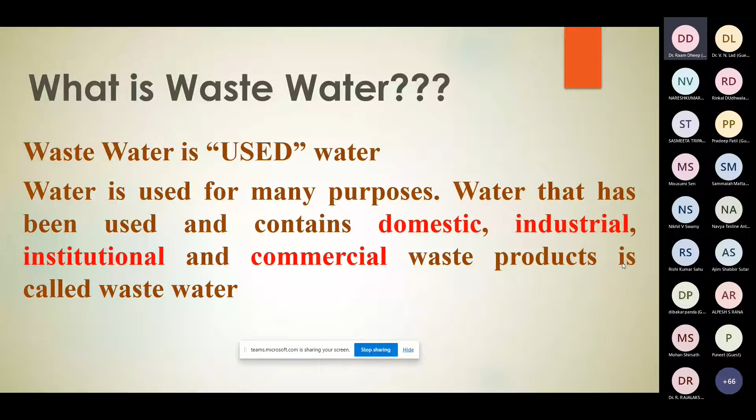I've used this simple terminology. So wastewater, which is also known as used water, is used for many purposes like domestic, industrial, institutional, and commercial. So what is our purpose? Our purpose is to use this water, and when it becomes wastewater, we want to reuse it by using some treatment, so it can again be used for some industrial or domestic application.

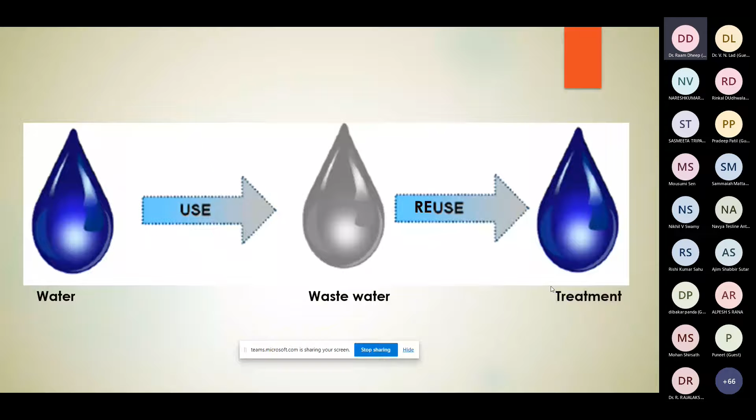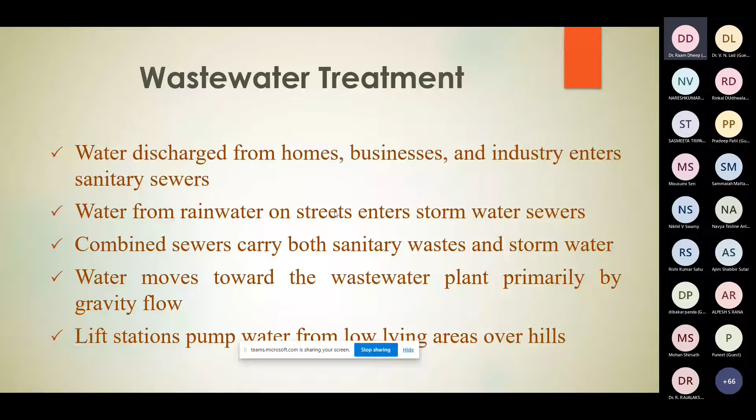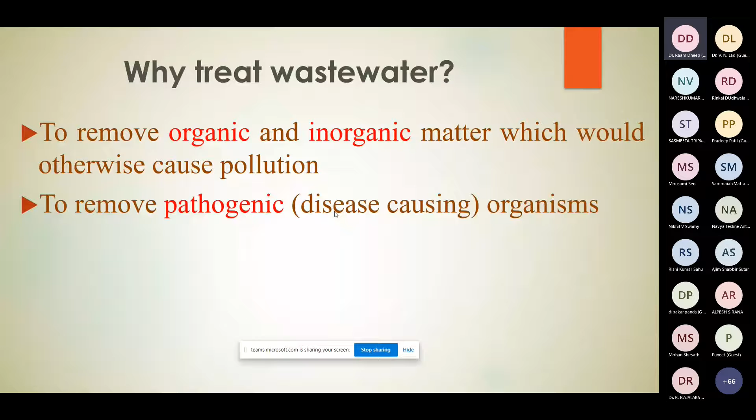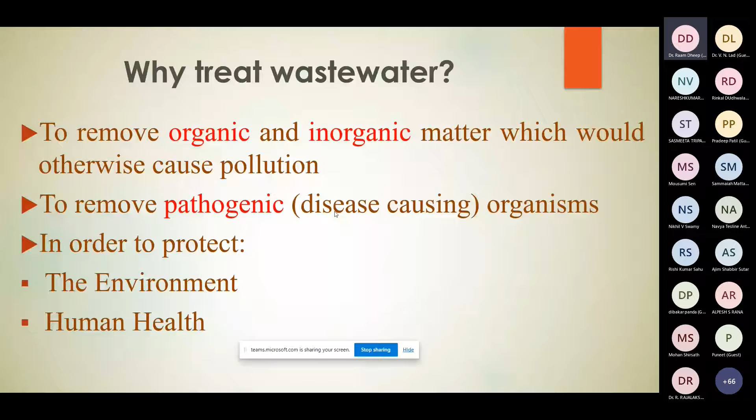What is the need of treating wastewater? It is very obvious: to remove mainly organic and inorganic matter which would otherwise cause pollution, then to remove the pathogenic disease causing organisms, to protect the environment and human health, obviously. So to manage wastewater discharge from homes, business, industry, to reduce the threat of water pollution.

Whatever the water, whether it is wastewater or any type of water, in order to find out the nature of water, we do three types of analysis, that is physical analysis, chemical analysis, and biological analysis, to determine various characteristics of water. So what are those characteristics of water? When you take the sample of water, you mainly do these three types of analysis: physical analysis, which consists of finding out the turbidity, the color of water, the taste of water, odor, that is the smell, temperature.

When you talk about the chemical analysis, you try to find out the TDS, that is total dissolved solids, pH value, hardness, alkalinity, fluoride, organics, metals, nutrients, etc. Biological or bacteriological gives you an idea about the indicator organism.

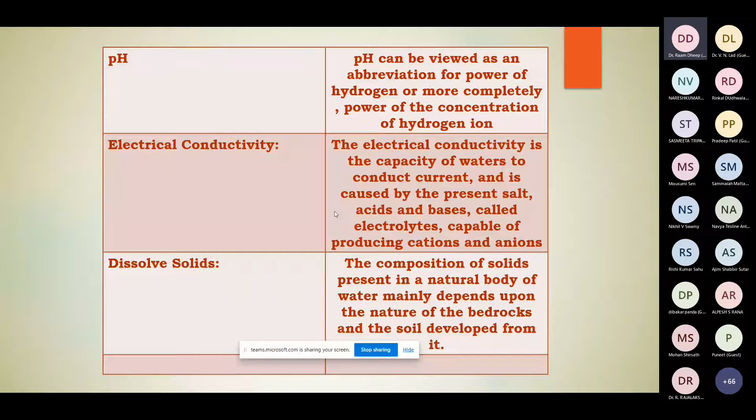So these are very simple definitions about pH, electrical conductivity, dissolved solids, and what exactly you will be able to find out from them. For example, through dissolved solids, you would be able to find out the composition of solids present in the water, then total hardness, dissolved oxygen, a very important parameter. From dissolved oxygen, there are two subsections: chemical oxygen demand, that is COD, which determines the oxygen required for chemical oxidation of organic matter.

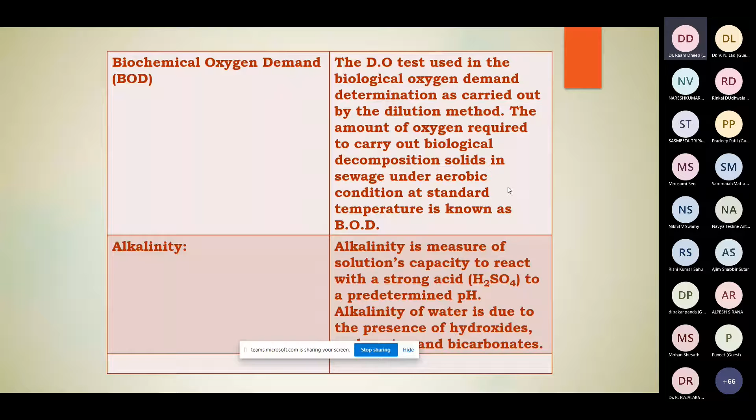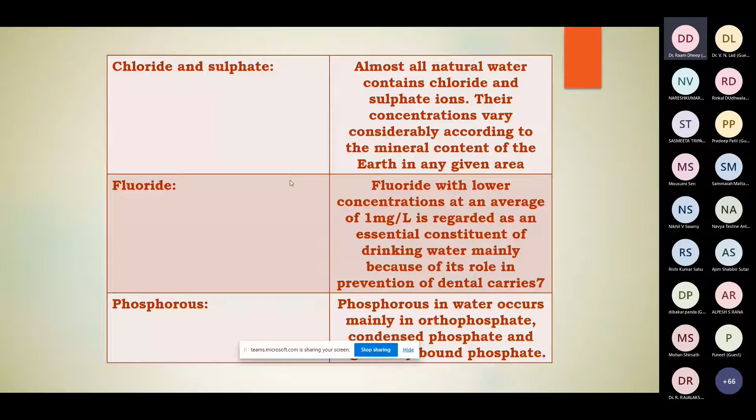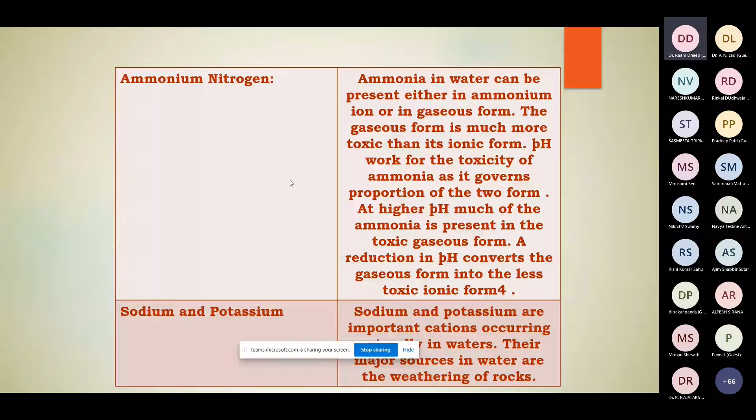Biological oxygen demand, which gives you the idea about the amount of oxygen required to carry out biological decomposition of solids present in the wastewater. Alkalinity, which gives you an idea about the presence of hydroxides and bicarbonates. Then chlorides and sulfates, the quantity of chlorides and sulfates present, the fluorides, phosphorus, and ammonium nitrogen present in the wastewater. This is one of the substances required to be taken care of, considering human health. Sodium and potassium.

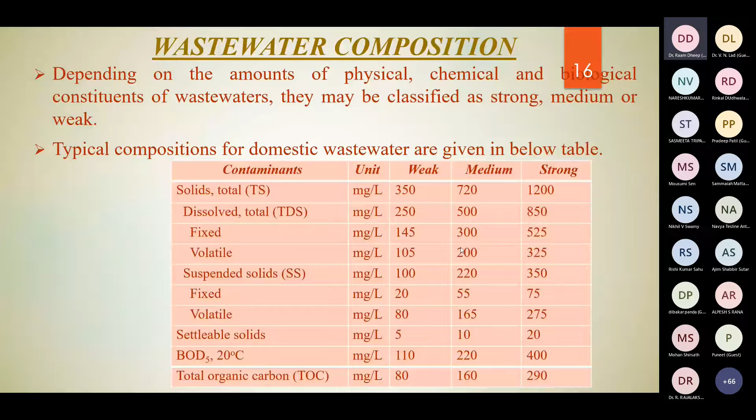The other contaminants are chemical oxygen demand, nitrogen, organic, free ammonia, nitrates, phosphorus, organics, and inorganics. These are the general guidelines which give the idea of which category the sample falls under.

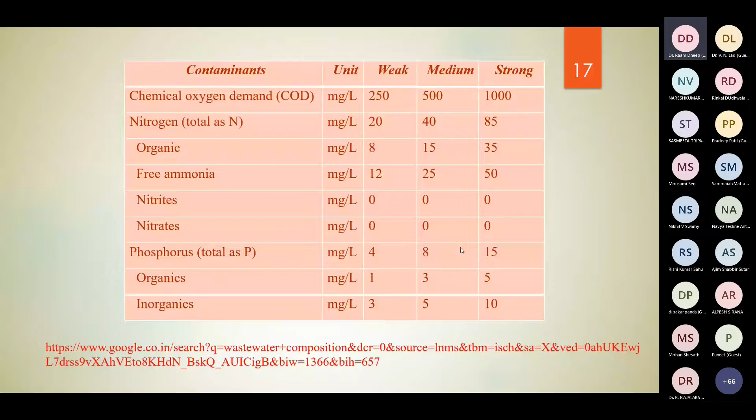What are the disease causing agents? Mainly these are pathogenic microorganisms. Because of them, waterborne diseases like cholera, dysentery or typhoid and others take place. These pathogens are generally carried in water by sewage and waste from farms and various industries. And when this water comes in contact with pathogens and is used as potable water, there is a possibility of causing such waterborne diseases, as I mentioned.

There are some peculiar pathogenic microorganisms, and typical treatments are provided so that they are eliminated completely. There are synthetic organic compounds found in the wastewater, depending upon the industry or source from which the waste is coming, which include pesticides, synthetic organic chemicals, detergents, etc. And unfortunately, these compounds are not biodegradable.

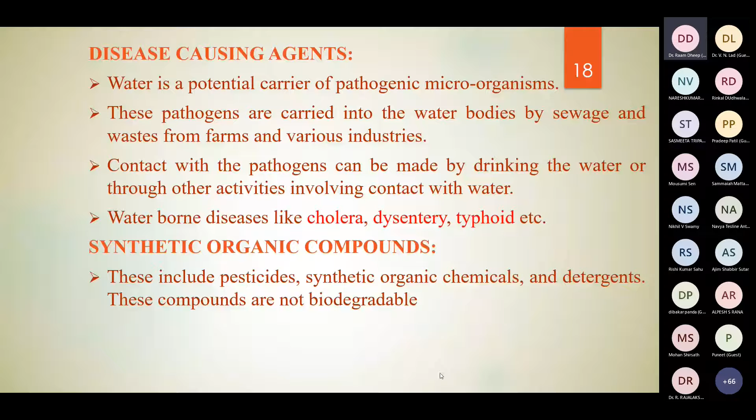Pesticides are one of the very important chemicals which need a proper treatment. It is observed that in the last decade or 15 years, the number of cancer patients has increased. Particularly, more cases are coming in females, and the conclusion is that this is only because of the increased use of pesticides in our day-to-day life, whether it is food or water, right?

So a pesticide is a substance generally used on farms for destroying insects or other organisms harmful to cultivated plants or animals. These pesticides are classified into insecticides, herbicides and fungicides. Chlorinated organic pesticides like DDT, dieldrin, aldrin are hazardous mainly due to their concentration in the food chain, and they are highly stable.

Not only are they highly stable, they have a low vapor pressure, very low solubility in water, and substantial solubility in oils and fats. So for example, generally it is about 0.00001 ppm of DDT, but that is also considered to be harmful.

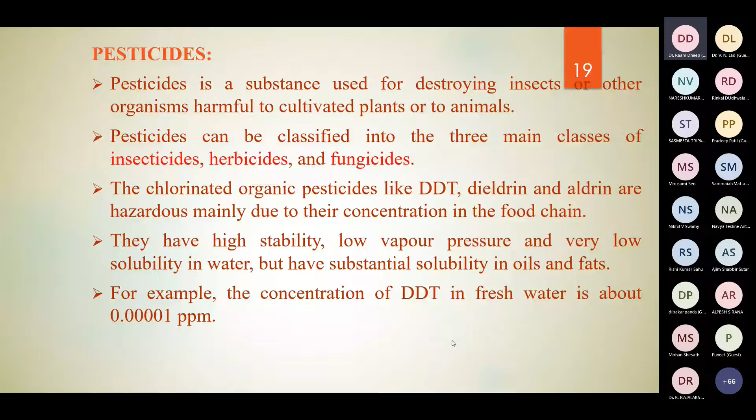Detergents are also sometimes found in substantial quantity in the wastewater, which contains approximately 35 to 75 percent phosphate salts. And phosphate salts cause a variety of water pollution problems. For example, it inhibits biodegradation of organic substances. Some plant nutrients are also found in the wastewater.

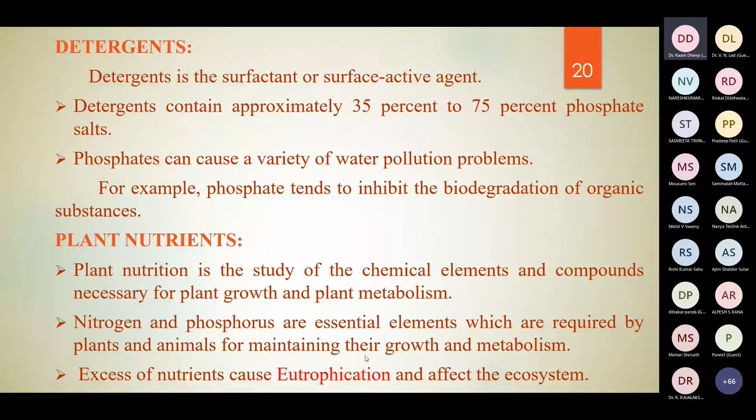Inorganic chemicals and minerals like calcium carbonates, lead, manganese, arsenic, sulfate, etc., are generally found. Sediments: when water is passing through various areas, the soil, sand and mineral particles are also washed away along with the water, and these sediments are generally found in a very good number, particularly in rock regions.

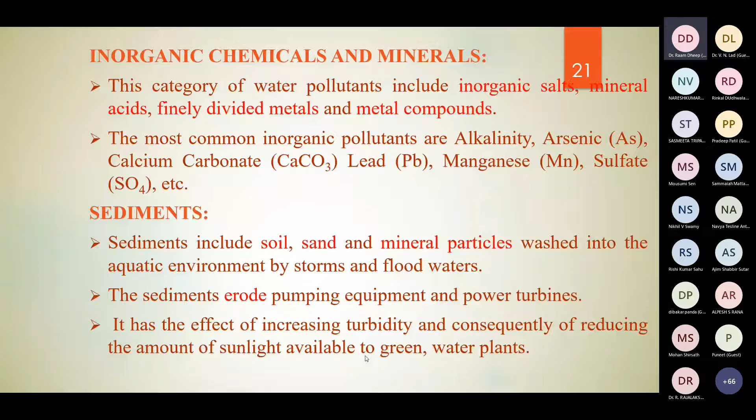Radioactive substances: if the source is a power plant or some kind of nuclear activity, some nuclear reactors, the wastewater coming out contains some, even a very small amount, of radioactive substances. Thermal discharge, like waste heat, is observed in wastewater coming out from power plants. The temperature of the water is generally more than the normal room or environmental temperature.

When the temperature of water is high, the dissolved oxygen concentration decreases, together with increased biological activities, which results in anaerobic conditions, and because of that there is a chance of increased algae in the water, and toxicity of pollutants also increases with increase in temperature.

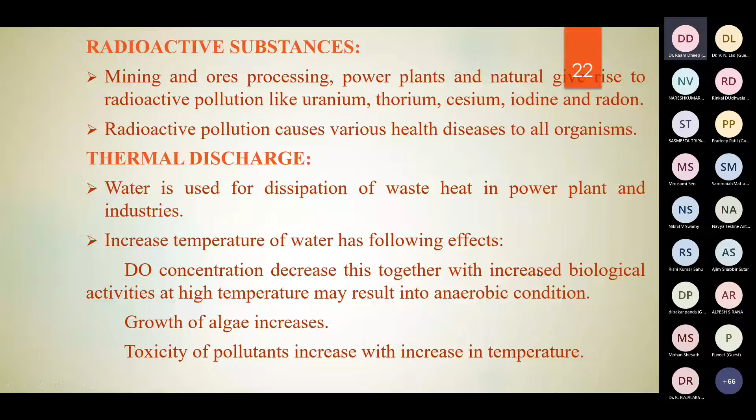Oil spills take place at different places, oceans and seas, or in petroleum refineries, petrochemical plants, even polymer plants. This oil floats on the water surface and prevents atmospheric oxygen from mixing in the water. So this is one of the issues which need to be taken care of, and it coats the body of aquatic animals and birds, and it may also kill them.

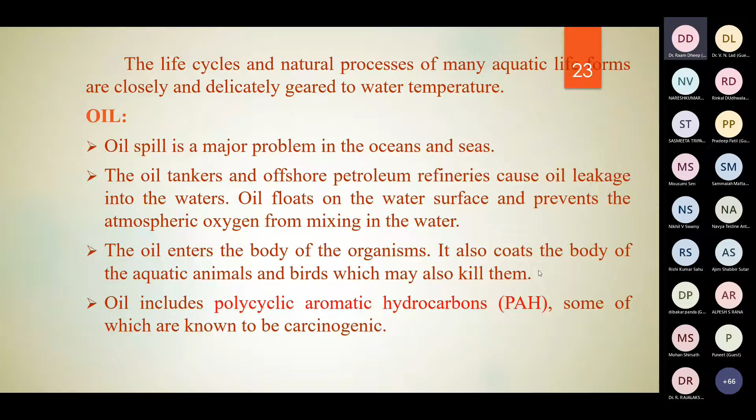This oil includes polycyclic aromatic hydrocarbons, known as PAH, some of which are known to be carcinogenic in nature. So whatever I mentioned are the various impurities. I'm using the word impurities or waste, which are generally found in the water, and because of that we are defining that water as wastewater, right?

I repeat again, I have taken these directly from the treatment plant, and most of the time they are finding these substances in a small amount or maybe a big amount, but these are generally the substances which are obtained. I'm using some terminologies for wastewater engineering. To begin with, I'm not going in detail.

Biosolids are classified into class A and class B. What do you mean by class A? Class A means biosolids in which the pathogens are reduced below current detectable levels, and class B means they are treated but contain higher levels of detectable pathogens than class A biosolids.

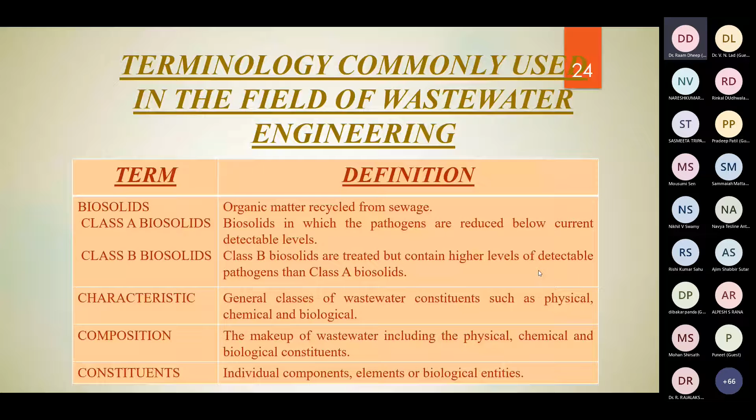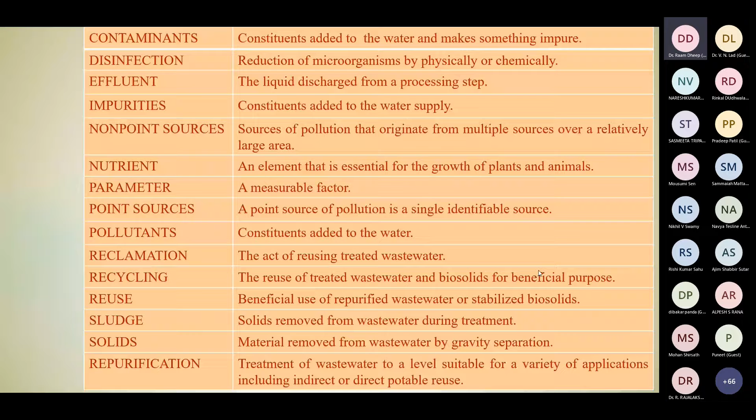The characteristics, compositions, constituents, all these things, I'm sharing this presentation after my lecture gets over. It will be useful to you for future use.

The government has been aware of all these issues for so many years, and because of that, both state and central government impose some kind of laws to control water pollution based on some standards. The Water (Prevention and Control of Pollution) Act was passed by the parliament, the first law, in 1974. So what was the objective? It was to control water pollution and to maintain water quality.

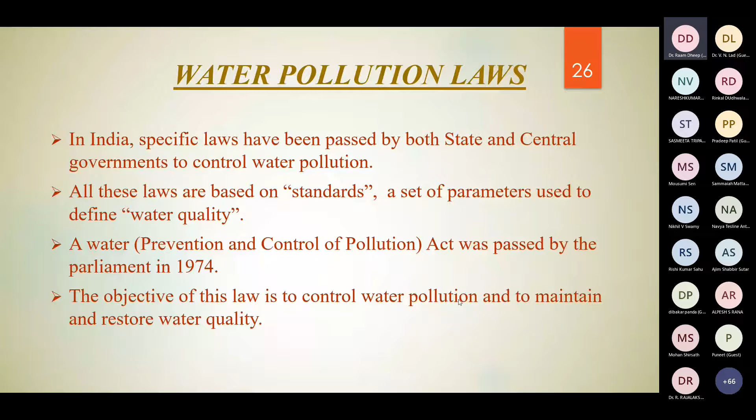The agencies which specify the norms for various effluents to be discharged in water bodies are the Indian Standards Institution, ISI, World Health Organization, WHO, United States Public Health Service, USPHS, and Indian Council of Medical Research, ICMR.

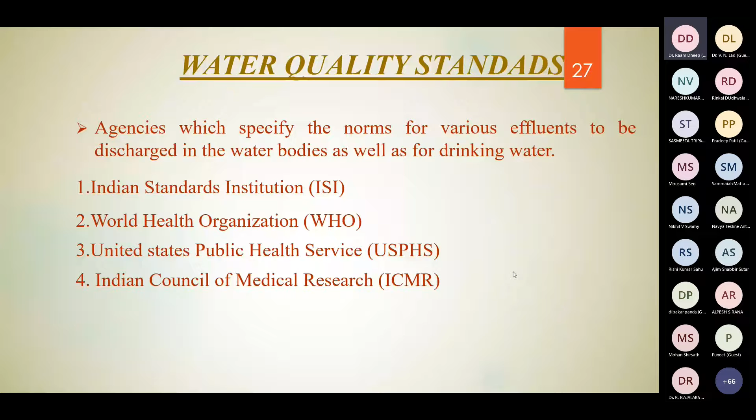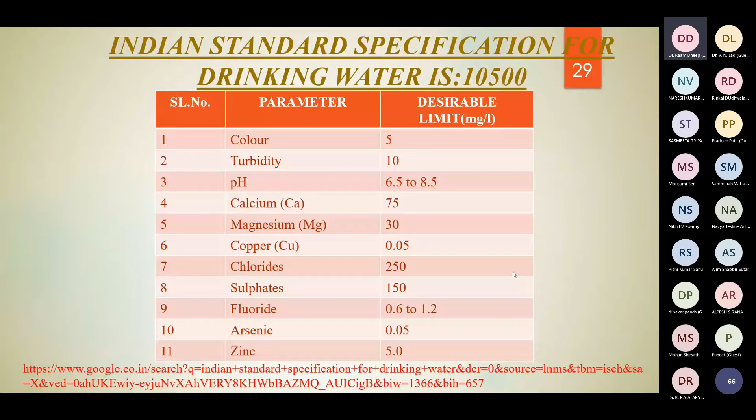Specification of drinking water as per IS 10500 standards. These are the parameters which have been taken into consideration. So wastewater treatment technologies are generally classified into, as I said, basically three types, but there are subcategories. Subcategories are also existing.

So the simplest and the first and foremost method is physical method: filtration, filtering, membrane separations to remove some visible solids or any material which are present in the wastewater. The second treatment, what we call chemical methods, for neutralization, oxidation, and electrochemical oxidations. People are using either one or two or a combination of two or three treatments, and there is a combination of physical and chemical methods, ranging from coagulation, flotation, sorption, ion exchange, etc.

And there is a biological method which gives some fine result or tuned result: processes with suspended biomass, that is activated sludge, attached biomass, immobilized enzymes, aerobic processes, anaerobic processes, anoxic processes, sets of combination of aerobic, anoxic, and anaerobic processes. A combination of these processes gives a very good result, optimized result. And there are disinfection methods which are very common nowadays, that is ozonation and chlorination.

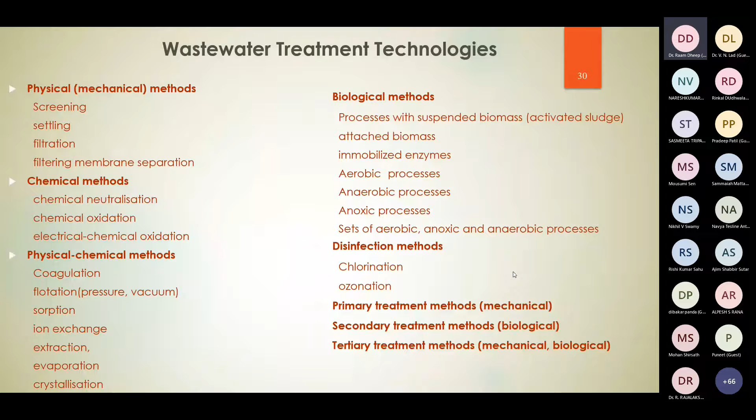So this is the simplest way of wastewater treatment, where not many complex wastes are present. But if there are some complex wastes, like in the form of chemicals or biological organisms, you require some more treatment, some more methods to be added.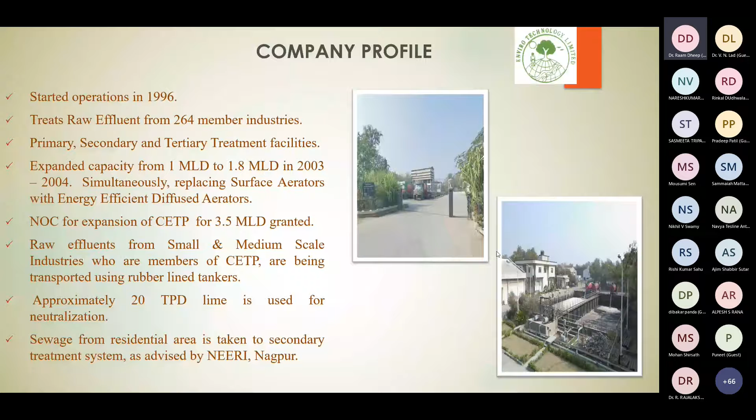So they are using microorganisms which were developed indigenously in the laboratory. This bacteria is used for stabilization of certain organic matter. So when this organic matter is found in the wastewater, they combine it with the bacteria. In the zoomed section, you can see that the bacteria easily gets connected with organic matter. And the density of this combination of organic matter and bacteria, what we call protoplasm, is more than the density of water.

I repeat again, what these people are doing is they have developed, with the support of IIT Kanpur, a specific kind of microorganism which they have not disclosed. This bacteria is used for the stabilization of organic matter which is present in the waste. So when this organic matter comes in contact with bacteria, there is very good affinity for bacteria to get connected with this organic matter.

And because of this connection, the combination becomes protoplasm. Protoplasm means it is a combination of microorganisms and the colloidal and dissolved organic matter. So the density of protoplasm is more than the density of water, and because of that it gets sedimented, or by gravity it gets settled. So the majority of the organic matter is being removed with the help of microorganisms.

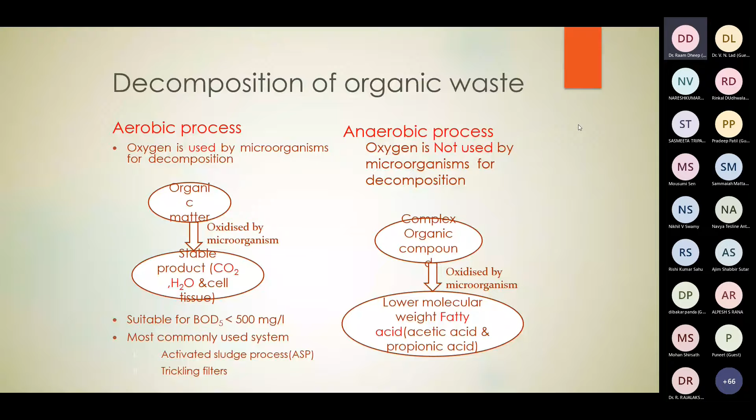Anaerobic processes are where oxygen is not used by microorganisms for decomposition. So when you have complex organic compounds being converted into lower molecular weight fatty acids like acetic acid and propionic acid, this anaerobic process is being used.

So this is a trickling filter plant. One unique part of trickling filters, as you are well aware of the operations, is that they have developed their own microorganisms with the support of IIT Kanpur faculty. What exactly is this trickling plant? How does the trickling filter plant work?

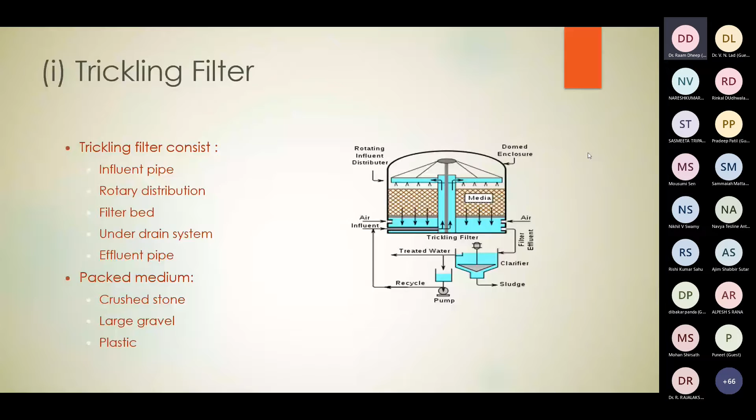The bed materials used are crushed stone, large gravel, and plastics. But the unique part is that water and oxygen pass through the bed, which consists of organic matter that diffuses into a film by the microorganisms present in the slime layer. They have distributed the microorganisms in a uniform way.

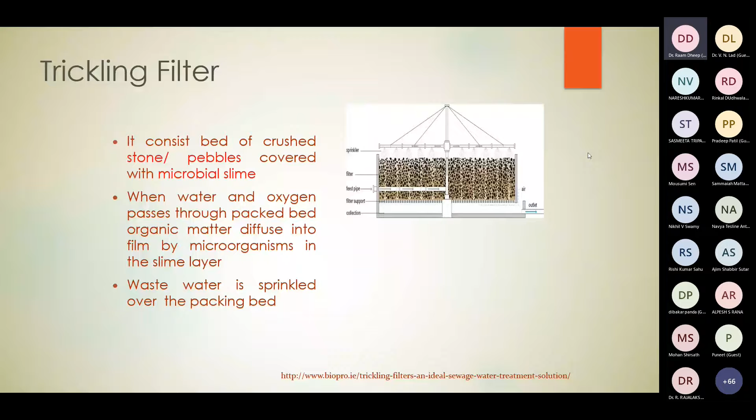Through the sprinkler, when water is sprayed on top of this bed, these microorganisms come in contact with organic matter, and when it comes in contact with organic matter, it diffuses into a film, converted into a slime layer, and because of that, sedimentation takes place.

So trickling filters are generally classified into three categories: low rate filter, high rate filter, and super rate filters. In this particular CETP, they are using super rate filters having very high capacity of BOD removal, around 65 to 85 percent, continuously operated plant.

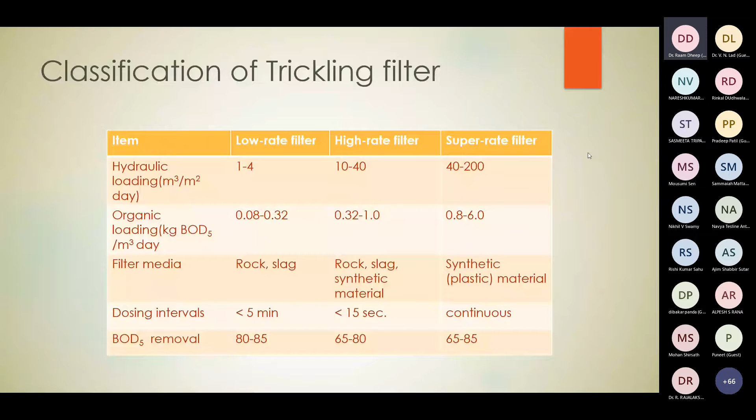What improvement they have made, I have taken a few pictures of this improvement. As I said in my inaugural speech, if possible, even if you get that opportunity, you must visit this site and see how the treatment takes place. It is just nearby Bharuch, and if you want to go and visit the place, just let me know.

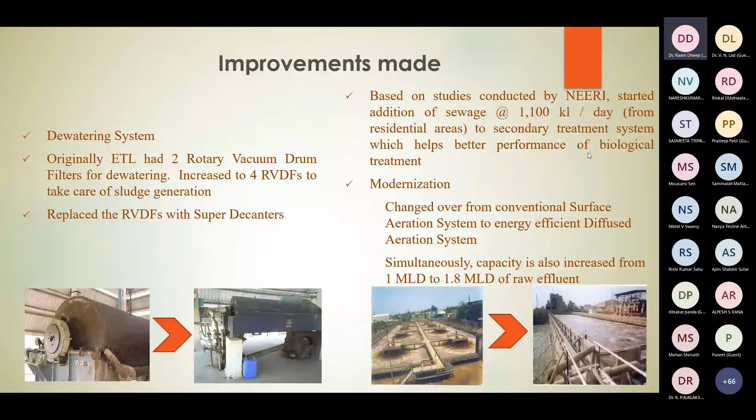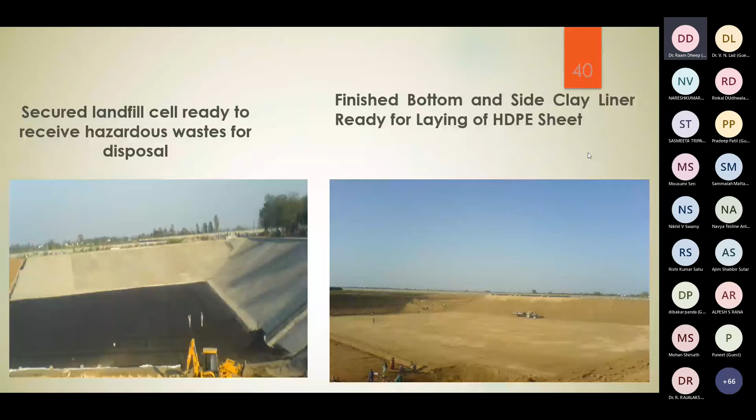You can see that. I will show you once again the early pictures. These are the early pictures, the transportation, stabilization, operations method. And you can see that it's completely covered with Jatropha plant, so it looks very beautiful from outside.

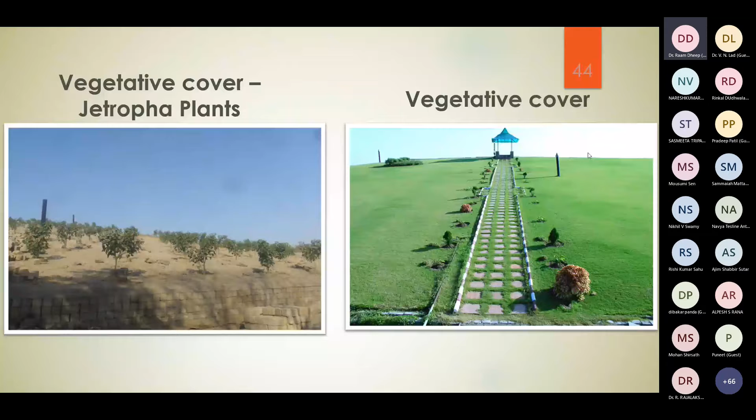So this is about one of the case studies of CETP. Second, as I mentioned, one of my PhD students, whom I guided and who completed a PhD with very good, substantial research work, she carried out work in the area where pharmaceutical waste is being treated with the support of photocatalytic oxidation using combinations of various nanoparticles.

It's a very unique work, and it was highly appreciated by different organizations. Fortunately, three different papers are published in standard Scopus journals with some good impact factor.

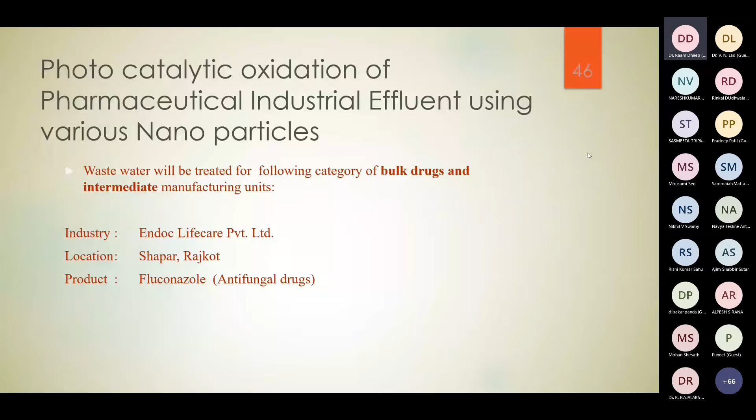This is a little bit complex, but what I'm trying to tell you by showing this is that you can explore various methods. You don't know where you'll get clicked.

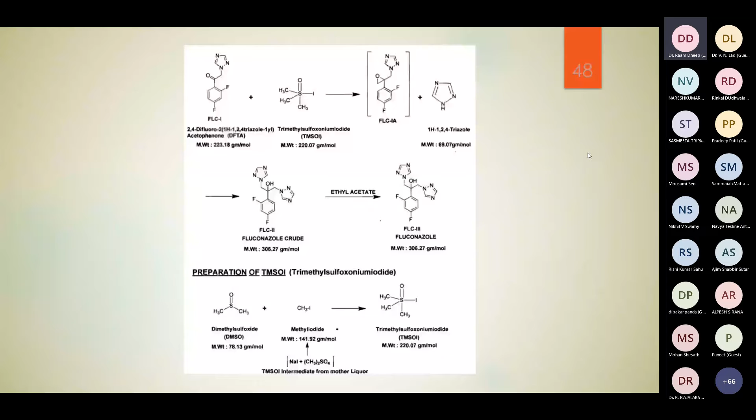One more thing I would like to tell you at this platform is that whatever work you carry out, always look for whether that work would be able to get patented or not. This is nowadays very important. The best part is our Government of Gujarat education department is proactive, motivating and encouraging all faculty members and students that if they are ready for applying for patents, they are providing not only financial support, but legal guidance has also been provided.

You must be aware about the SSIP cell. Through SSIP cell, you can apply for patents. But applying for patents, submission of patent is very, very important and must. I'm very happy to say that not only my papers, our students' papers got published in some good Scopus journal.

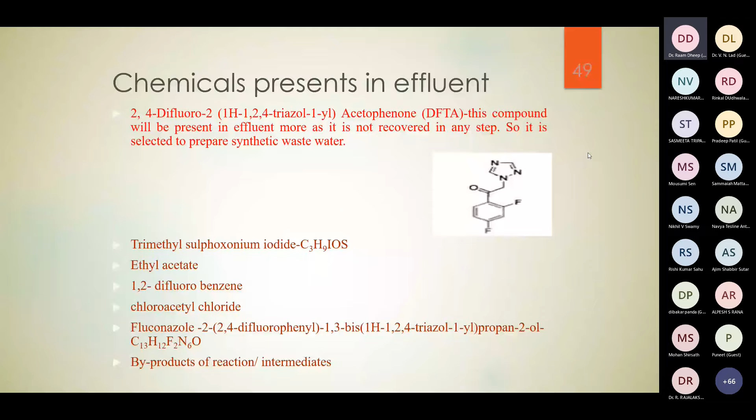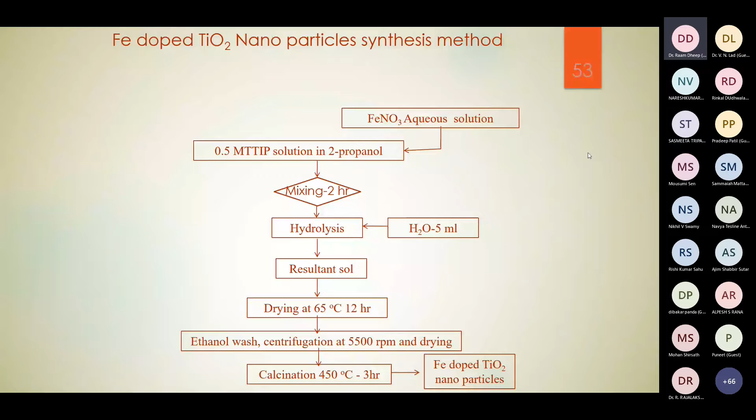Papers, but patent also got filed, and it is on the last or second last stage of approval. So this is nanoparticles method, and these nanoparticles have been prepared in our laboratory only, with minimal support of equipment and instruments. You can see the photographs of nanoparticle synthesis being carried out using the laboratory apparatus and equipment only. If interested, I can also give you some kind of guidance or support.

Most of the time we think that we are not able to do, or we can't do some kind of research. It takes place only in UDCTs or IITs or some national institutes, because we don't have much resources available. It is not like that. If you have that will, you will find out the way anyhow.

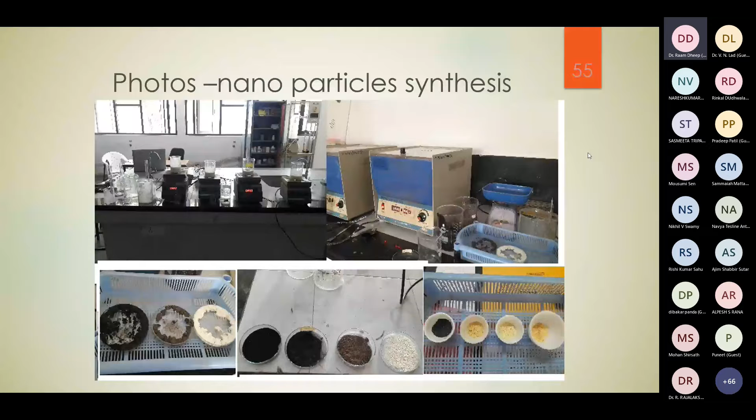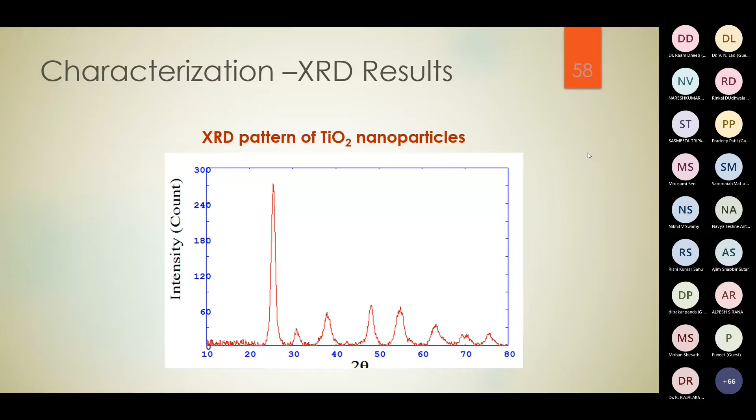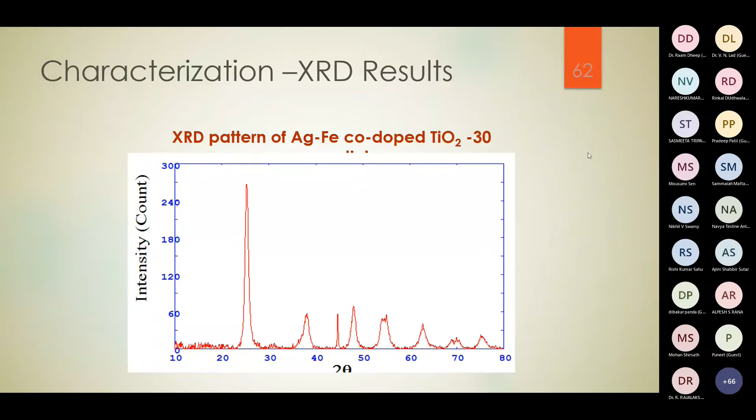So these are some of the positive, successful results. This is nanoparticle synthesized and the pattern with peak which is obtained. Just for your information, I am showing this data to give you an idea that you can also think of combining some kind of research, interdepartmental, intradepartmental research, and it gives sometimes very good results.